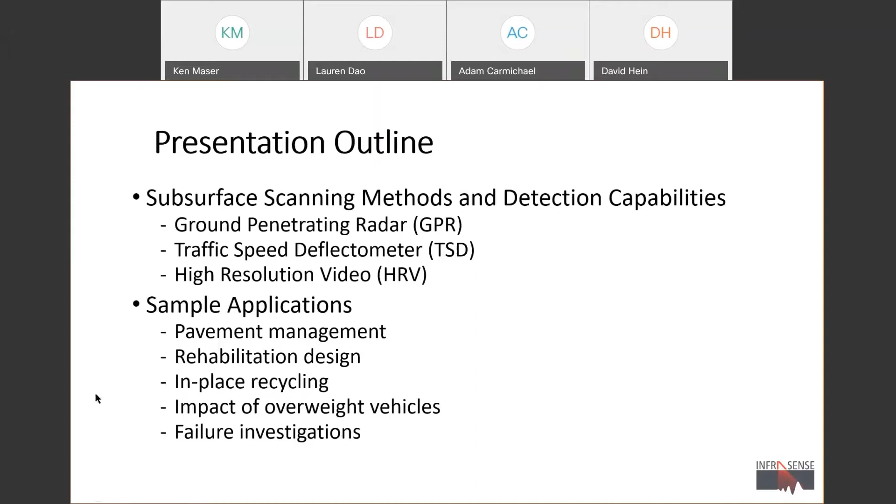So first I'll talk a little bit about ground penetrating radar. I know the Minnesota Materials and Research Group has done a lot of work with GPR, but for those of you who are less familiar, I'm going to go over it a little bit.

The sensing elements in GPR are the antennas. They transmit radio waves down into the pavement, which reflect off of the different elements in the subsurface and come back up and get measured.

The setup shown here is the typical highway survey setup. The antennas are in the back on this vehicle; on some vehicles they're in the front. But because they can operate elevated above the pavement surface, data collection can take place at normal driving speed.

The rate of data collection can be controlled using a DMI, a distance measuring instrument, and you can choose to collect 1 scan per foot, or 4 scans per foot, or 1 scan every 4 feet, whatever you choose. So the rate of data collection is quite flexible.

The location of the data is logged with a GPS, generally mounted to the vehicle, so that every piece of GPR data has a lat and long associated with it. So when we plot out the data, we know exactly where it is.

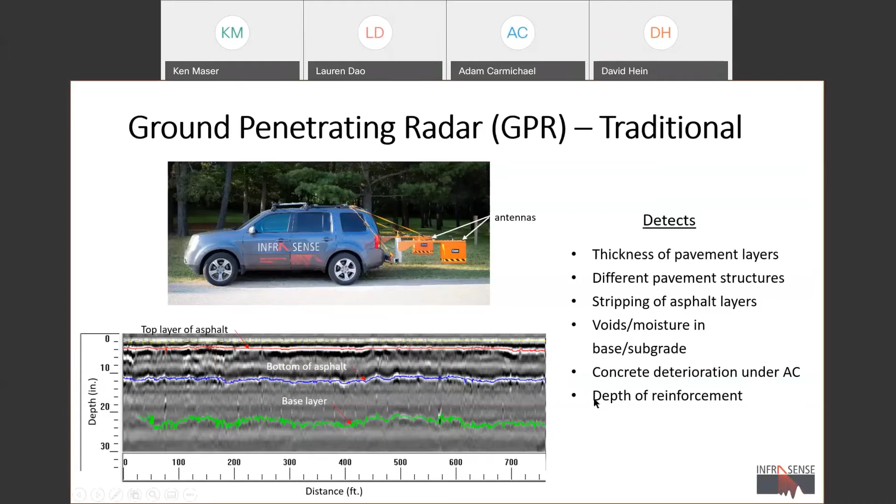Here are a couple of GPR images that show a little more detail. On the left, we have a composite pavement which has been overlaid. Basically the surface is all asphalt, but the interest was in finding areas that had been repaired, which you can't see from the surface.

But with the GPR, you can see these little hyperbolic blips are the rebar for the concrete, and you can see they're absent in this middle section, which is where there's a full depth asphalt repair.

So in this particular project, those repair locations could be readily identified, even though they couldn't be seen from the surface. On the right, we're looking a bit deeper, down to about 2 meters, where we're identifying 3 culverts. You can see them by the shape of this reflection, along with the frost taper associated with their excavation.

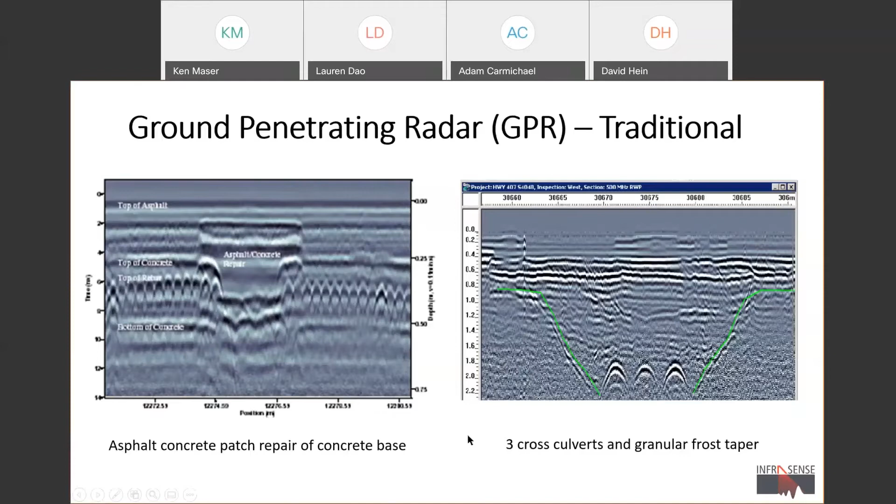Now, I've referred to that so far as traditional GPR. There's a newer type of GPR system called 3D radar. The GPR I showed you had 1 or 2 antennas, and you got a single line of data at a particular offset. With this 3D radar system, this unit on the back of the vehicle has actually 21 antennas, each of them 3 inches apart.

So in addition to getting quite a bit of detail going longitudinally down the road, which is normal for GPR, you also get a lot of detail going transversely. So certain issues where we need information in detail in both directions are very well addressed with this newer 3D radar system.

The example I've shown here is a bridge deck, and what we're looking at is a plan view looking down on the deck at a particular depth, in this case the depth of the rebar. In this depth slice, you can see the entire deck, you can see the joints, and you see evidence of reinforcing, with that rebar pattern blown up for one of the spans here. So you see all the transverse bars, and you also see the longitudinal bars as well.

So quite a bit of detail in both directions is available with this kind of system.

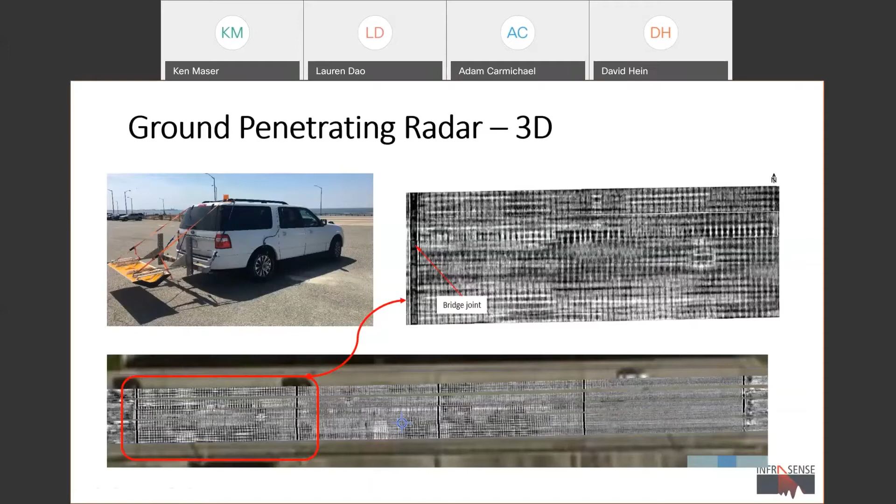The second technology I'd like to discuss deals with measuring deflection, traditionally done using a falling weight deflectometer. More recently, we've seen the introduction of the traffic speed deflectometer, a piece of equipment that can measure pavement deflection while moving at normal driving speeds, allowing deflection measurements on up to about 200 miles of pavement a day.

The system works with a series of Doppler lasers mounted forward of the rear loading axle, and each of these lasers measures the velocity of the pavement. By combining the vertical velocity of the pavement with the horizontal velocity of the vehicle, you can get the slope of the deflection curve. Once that slope is integrated, you get the deflection curve. So with this system, every hundredth of a mile, a deflection curve is reported. Quite a bit of information.

The TSD goes quite well with GPR because both are getting continuous information. By combining those two with the layer structure and the deflection, we can go through back calculation to get the pavement moduli, the subgrade modulus, and then calculate structural number and remaining life. At the bottom right here is a plot of remaining life. With that information, we can segment the pavement into subsegments based on remaining life, which for making decisions is a lot more effective than dividing it up based simply on surface condition.

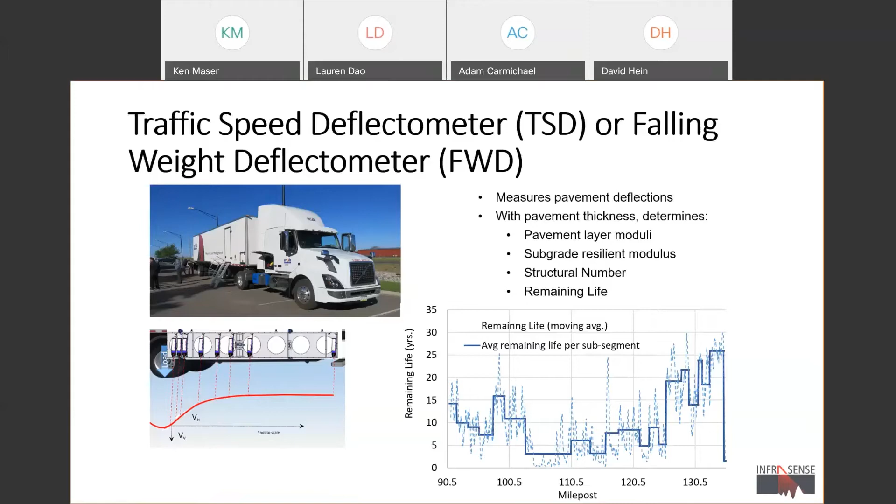We combine subsurface information with near surface and surface information. This is a system that does both high resolution video and infrared thermography. The cameras are mounted to a vehicle imaging the surface of the roadway directly in front of it. The infrared image shown here in the middle shows anomalies associated with delamination in the concrete. The sun hits the pavement, the areas over the delaminations get hotter because the heat can't travel through, and they get picked up very readily with an infrared camera.

So that's another bit of subsurface information we can add. Finally, we incorporate it all into the surface image by stitching together a complete video of the surface, so now we see all the surface features we're accustomed to looking at, including cracking, map cracking, fatigue cracking, longitudinal and transverse cracking, spalling, etc. So now we have the complete picture — we've seen elements of the subsurface and elements of the surface.

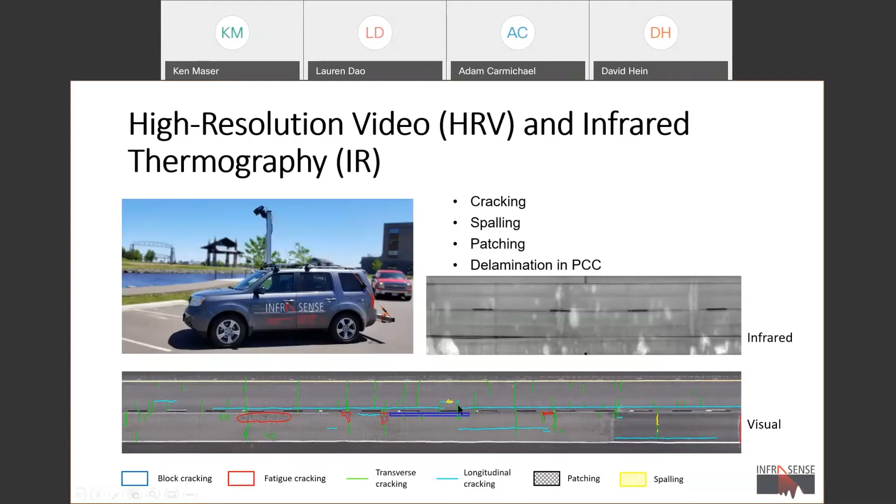That's where we're starting, and the idea here is to take what we see on the surface and understand that it's caused by something going on underneath — whether it's weak subgrade, stripping in the asphalt, inadequate pavement structure, voids under the joint, etc. The better we understand those conditions, the depth, the nature and extent, the better decisions we can make about how to address them.

So there are various applications of this methodology that we'd like to discuss, and we're going to do that over the remainder of this presentation.

One question has to do with validation with cores for pavement thickness. That's often done — it's not necessary for the analysis, but precision can be tightened up by having cores available, and cores are also useful to identify material types within the pavement structure, which are not necessarily obvious with the GPR.

A second question is, can the 3D radar look at dowel bars or tie bars, and if so, what accuracy? The answer is yes, and it's been done. I have not included that in this presentation, but if you send an email or contact us, we can send you some information on that.

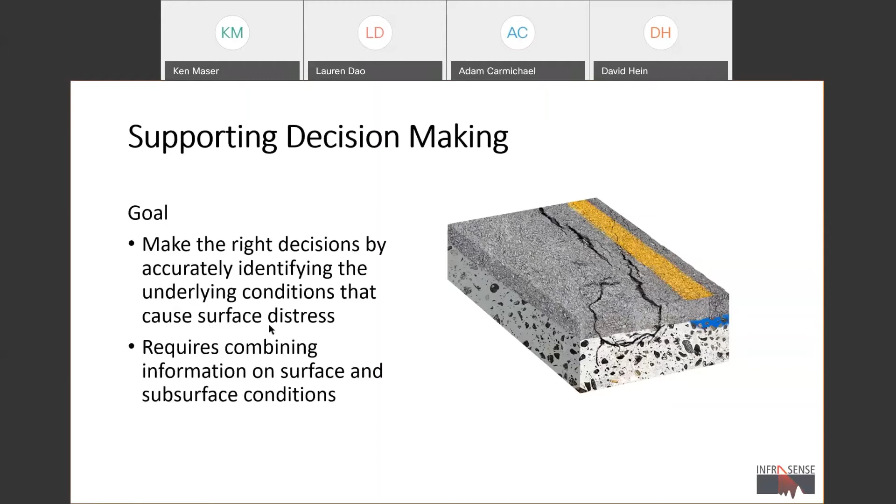So I'm going to move on and talk a bit about some applications. The first application is network level pavement management. The idea is to make decisions based on remaining life, which seems to me a more sound way of making decisions rather than simply on what the pavement looks like on the surface. Those decisions, the remaining life, would be calculated using information on the pavement structure.

This analysis would be achieved by combining the deflections from the TSD with the layer thicknesses from the GPR to get the various moduli, structural number, remaining life, and then calculate with traditional methods the required overlay thickness and remaining life. So we get quite a bit of information here.

TSD and GPR provide information every hundredth of a mile, so we get hundreds and typically thousands of data points for a particular network. We found it useful to present this information in a geospatial way so it could be easily visualized for both network and project level decision making, and also aggregated into homogeneous units for management decision making.

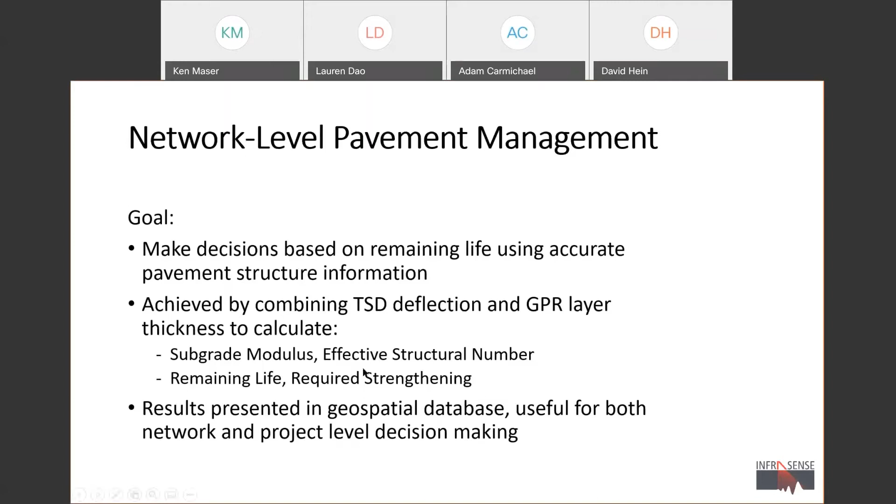This is one example of that visualization, showing asphalt thickness on a 1,000-mile network out in Idaho. This display uses Idaho's GIS system called iPlan, so anybody can go there and look at this data. This is showing asphalt thickness, with the color scheme being less than 2.5 inches as red, greater than 8 inches as green, and various colors in between. So you could very quickly get a look at the layer thickness on this network.

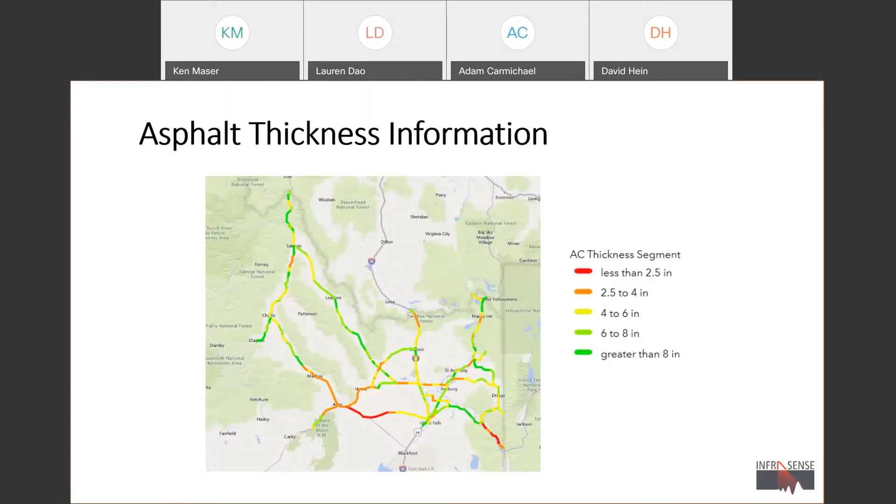But even further, we can take the TSD deflection data collected on this same network, do the analysis, and calculate remaining life. This picture shows the remaining life, also color-coded, with red being less than 3 years and green being greater than 17 years. So very quickly we get the picture of what's going on. We can zoom in and get quite a bit of detail, seeing things of interest at the project level. All of the underlying information is in the attribute tables beneath these maps and plots, and you can download that information to get all the details.

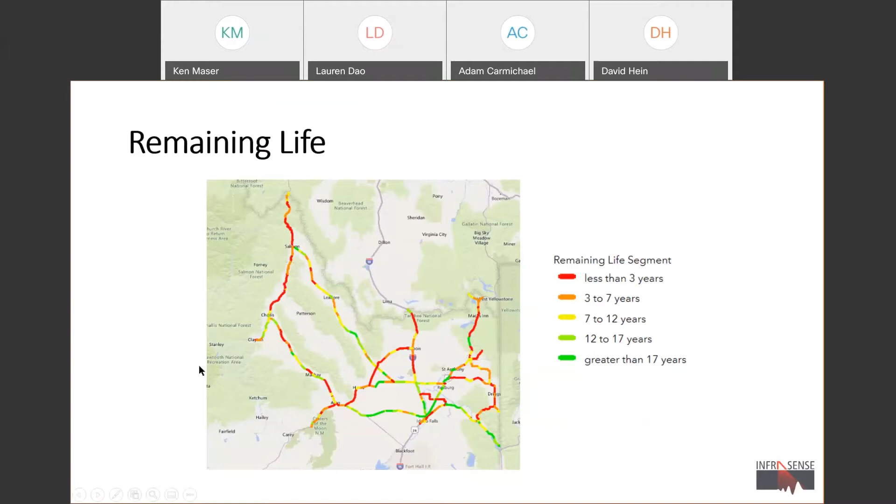A second application I'd like to discuss is rehabilitation design. In this case, the example is concrete repairs for a composite pavement. This was a 30-mile overlaid concrete pavement section exhibiting pumping and faulting at the joints, as well as surface cracking. The client agency needed to select the appropriate rehabilitation strategy, but the alternatives available differed in cost by several million dollars, so they wanted to make sure they were picking the right strategy and doing the right thing.

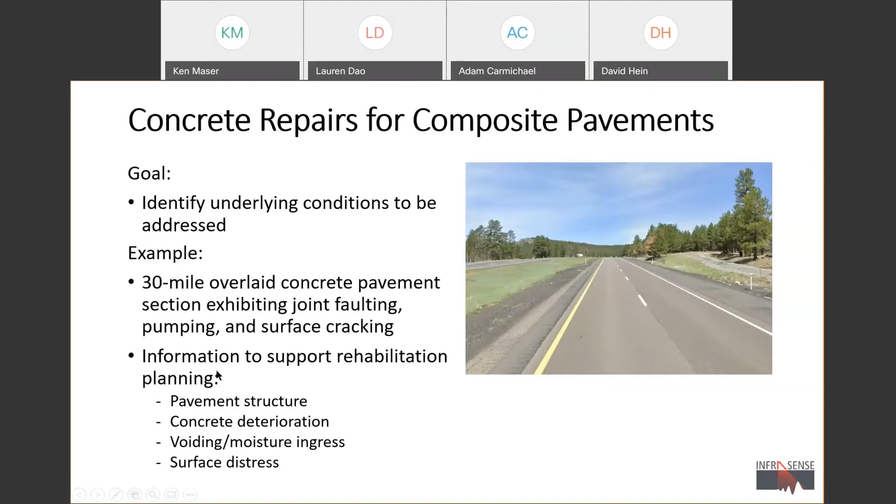So we carried out a fairly comprehensive analysis, looking at the thickness of the overlay, as well as the concrete, base, and subbase thickness. We located some full depth asphalt as well as composite sections. The locations where transitions between these pavement types would determine deterioration of the concrete underneath the friction course were evaluated, and areas where joints showed evidence of moisture infiltration and voiding were also identified. Surface distress was also mapped and combined with the subsurface information. This was a fairly comprehensive evaluation.

This slide shows examples of the type of information provided. In the upper left, percentage of area of concrete deteriorated underneath the asphalt versus project station. You can see it ranged in a lot of areas from 5 to 15%. Some places there was none, some it was quite high, but it gives a fairly big picture of the overall condition of the concrete.

On the right here, this is a GPR image of the concrete. This band I'm showing is the bottom of the concrete, and at every joint you'll see a little blip, but at joints with voids and moisture infiltration, that blip becomes a lot more prominent, and that can be calculated and identified. This table shows areas at stationing and coordinates where voids were located underneath the concrete, giving the agency the ability to go out locally, look at these areas, and do further investigation. Finally, at the bottom is a map showing both the surface distress and the deterioration in the concrete underneath the surface.

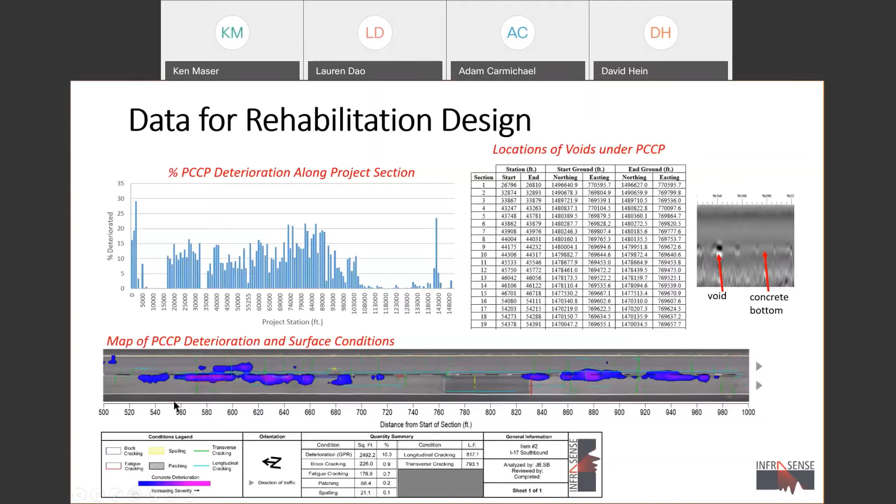About in-place recycling. Thanks very much, Ken and Lauren, for the introductions, and all of you folks for spending a little bit of time with us here today, talking about pavement rehabilitation and rehab, et cetera.

One of the other really useful applications of GPR technology is in helping support things like in-place recycling efforts. A lot of what we do these days is not so much designing new infrastructure, but rehabilitating what we've been constructing over the last 40 or 50 years or so.

Thickness is really important in technologies such as cold in-place recycling, and full depth recycling, be it with emulsion or with expanded/foamed asphalt. The asphalt thickness itself - we typically want to recycle as much as we can in situ. This helps with reducing waste and is less expensive than many other techniques.

One of the key aspects we need is the thickness of the asphalt in particular. So we typically will go out there and design our recycling efforts to take not all of the asphalt layer. We need to leave some material behind for a couple of reasons.

One being we need something relatively good to support the recycling equipment, because some of this - you see the train in the picture here - is very long and quite large.

But also because we design our recycling efforts to add emulsion or expanded asphalt to optimize the remixing of the material and laying it back down on the roadway.

So on a lot of these projects, longitudinally on the roadway, most people don't really know exactly what the thickness of materials are. Maybe they did 50 years ago when they first laid them down, but ultimately we typically do some cores, or maybe boreholes, but at least cores to validate the thickness of the materials.

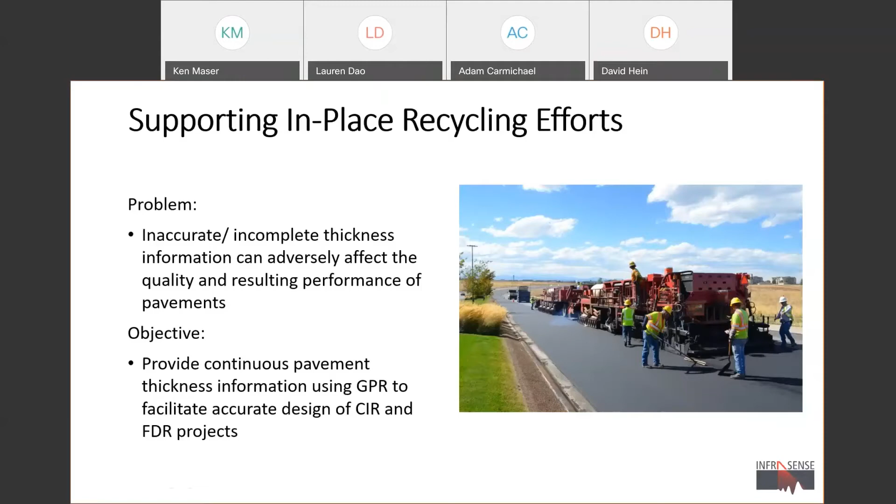Go to the next slide, Ken. So we go down the roadway, collect data. This data can be done, as Ken showed you, with the 3D radar, where you're doing an entire lane width potentially. It is more expensive to collect data using that type of equipment than a traditional GPR device.

So you can also go down the roadway multiple times, and I see that was one of the questions that was asked earlier - do you go down it with one radar device in one line? Well, we can offset that on the vehicle, or the vehicle itself being offset potentially, and we can take multiple passes longitudinally down the roadway.

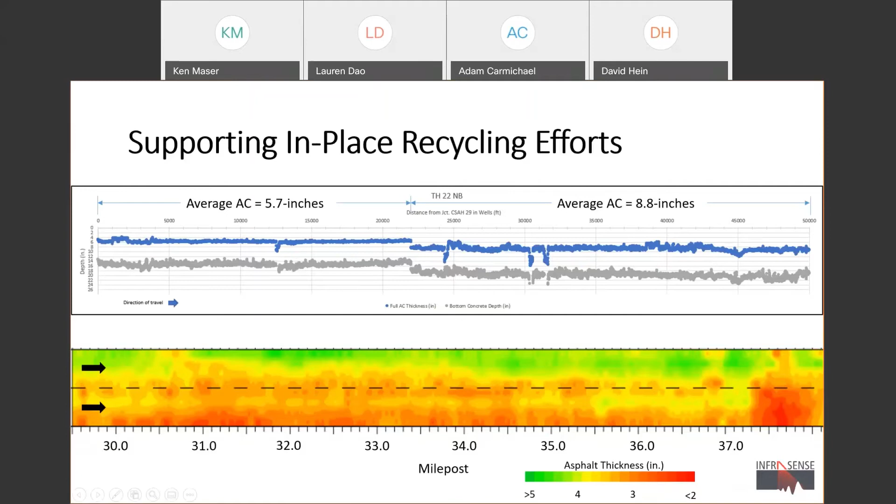Utilization of GPR data in conjunction typically with deflection data, be it the TSD that Ken mentioned earlier, or potentially conventional falling weight deflectometer type deflection data.

And everybody's got this problem: overweight and super heavy loads. Ultimately, we put load restrictions on our roadways to protect the roadways so that we will not consume all of its life. In the northern environment, certainly in Minnesota, we have spring load restrictions.

A lot of work has been done actually in Minnesota on spring load restrictions, contrary to the desires of the trucking industry, obviously, because when roads are frozen, with high stiffness, it's not a problem - we can move loads with minimum damage to the pavement structure. But in the summertime, when we've got the water out of the pavement, it's well drained, it's going to have pretty decent structural capacity.

But in the springtime, that very short period, maybe 4 weeks, 6 weeks, maybe some places 2 months, we can consume 50, 60, 70% of the life of the pavement in that very short period of time, because we've got water in the pavement. It was frozen, it's starting to melt. That water acts like a lubricant between the individual aggregate particles and the soil particles. And so they're in its weakest condition.

So we don't want to have heavy loads, so we slap on spring load restrictions. The trucking industry is not happy with us. We want to make sure we get them on before it starts to unfreeze. We want to take them off as soon as we can. So a lot of people do a lot of work over the years in evaluating that infrastructure to get the right time when we can allow the trucks to go back on.

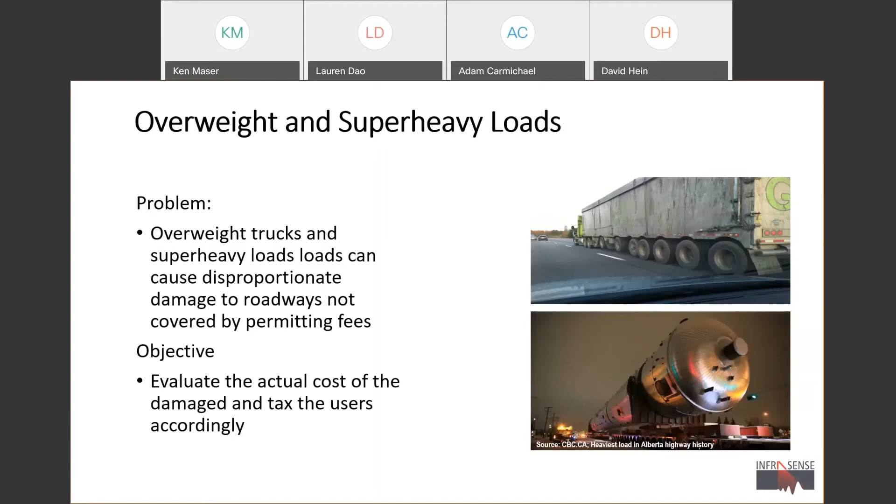So I've got basically three different methods that we use to calculate potential impact. And the most common one, and a couple of questions earlier were asked about the methodology for structural capacity or remaining life. And AASHTO 93 is one of the easiest ones that most people use. I call it a simplified method. It is very coarse. It's based on research and work that was done back in the 1950s, 1960s. It is being replaced nowadays by mechanistic design, pavement mechanistic design.

And what we want to do is collect data. Particularly, we need pavement structure information, because that's converted to layer coefficients and the structural, the modulus elasticity of the individual layers that turn into layer coefficients, and then they may be discounted based on the condition of the pavement. In other words, the asphalt may have a layer coefficient of 0.4, 0.42, and you're going to assign it something like 0.3. So the condition is part of the information.

It may be based on structural capacity. So using AASHTO 93, you can use the in situ structural number, the SNeff, the effective structural capacity, and assess some sort of damage to it. So we look at, here's what the in situ is, here's what the vehicles that are going to be using it, what is the remaining life, what is the consumption of that remaining life of the pavement.

And it's very different if it's a major interstate, that are built to handle loads without spring load restrictions than it is with a rural roadway or rural highway. Rural highways, one pass of this vehicle may consume 20, 30% of the life of the pavement. And this happened, and I know from personal experience in Pennsylvania, when all of a sudden we've got all the water trucks and these concrete trucks and the sand vehicles for fracking, et cetera, literally destroying the pavement, with the number of loads they have in the period, and they were literally pushing equipment out with dozers because they got stuck in the pavement.

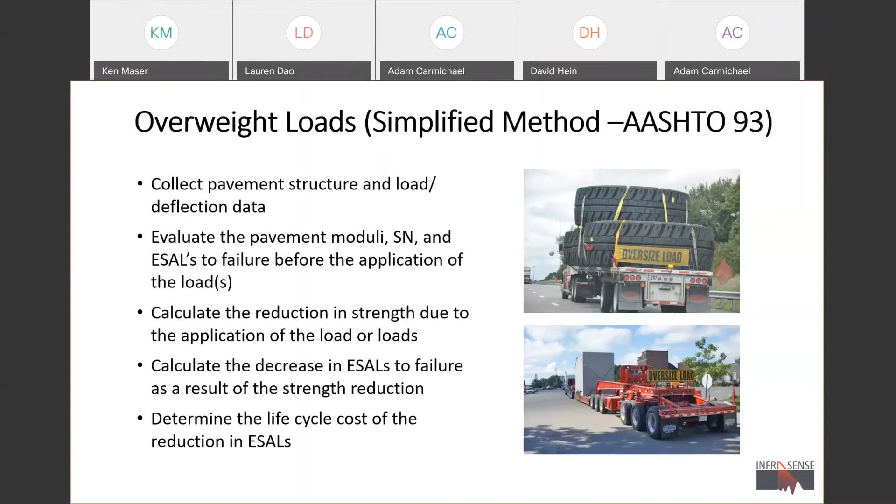So especially with the lower volume roadways and the thinner pavement structures, you could cause significant amount of damage. So based on ESAL, relatively simple. Next one. So then we have what I call the mechanism.

Well, it's a pavement ME design, mechanistic design, and this has been used around the planet since the 1970s. The guy that taught me how to do this was Per Ullidtz from Dynatest in Denmark, and he was doing it on a programmable TI calculator back in the 1970s. So this is not new.

It is newer to North America than many other countries around the world - think France, South Africa, Australia, et cetera. A big effort was made starting back in the early 2000s to move to more realistic design, because we now have the computing power to do so.

It's not the deflection that causes the pavement to crack, it's the bending that occurs, the strains that occur in the pavement that cause it to crack. So when we're looking at moving some of these other heavy loads, we can use the new mechanistic design.

It's got a module in it that allows you to do non-standard vehicles, or you could do this using other techniques, of course, not just pavement ME. And so we take into account...

much difference in traffic. We no longer use ESALs, we use axle load spectra, which is the individual axles themselves, the quantities of them, and the weight on individual axles, because each of those different axles cause different stresses and strains. So we can use the ME design to calculate things like what additional thickness would I have to apply to the pavement to get the same stresses and strains we would have had without those vehicles.

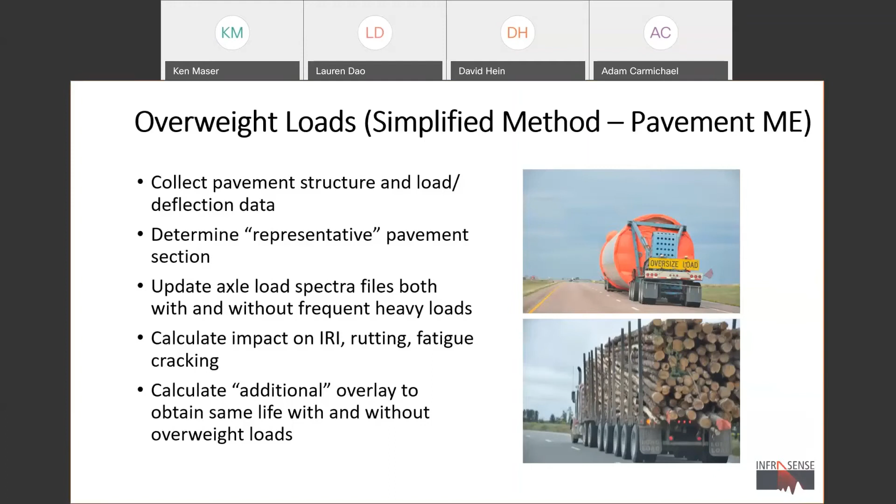And by doing that, we can assess the additional strengthening that's needed - maybe a quarter of an inch, or a half, or an inch of material - and we can assess that cost and lay it on the people who are using the roadway and consuming it, that normally would not have been doing that.

Then we have the more complex, super heavy loads. Again, here's another reason why it's really important to have the pavement structure, because the methodology I'll show you here that we use to calculate stresses and strains is specific to the individual load.

So we've got one huge cracker that's used to convert oil into polyethylene, or polypropylene. They're not going to be doing this on a continuous basis, they're going to be doing it once - moving a piece of equipment that was built in point A to point B, where it's going to be provided in an industrial facility.

Some of these facilities are very rural, and they go over large areas of roads. So you may be looking at a movement of a vehicle that's going to go a couple hundred miles. As much as possible, we put them on barges or boats, sometimes rail, but usually there are elevation issues with that, so they end up moving down the roadway.

We can move power lines higher, or other elements. We can plate the pavement to make sure we don't crush the culverts and stuff like that. So pavement structure information is really important, because the methodology to calculate the stresses and strains takes a long time.

So we have to develop what we call representative pavement sections. We don't go out - I had a client once that asked me to analyze 1,000 miles of road using pavement ME every 500 feet. This would take the rest of my life, or a massive amount of computing power, to make that happen. So developing a representative pavement section is really important.

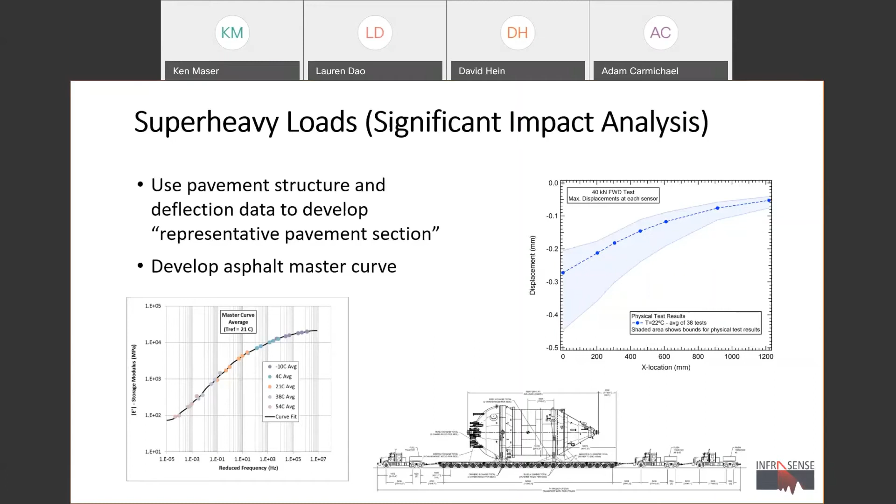In the individual vehicles, you see the axle loads on the bottom left-hand side there. We've got a substantial number of axles. The equipment is different, it's used to level the weight over all the axles more evenly. The rubber in the tires is 10 times the thickness of normal tire rubber - very thick walls in terms of thickness that don't allow the tires to spread out. So their impact on the pavement structure is really, really important.

And I can't do this every 500 feet - it's absolutely physically impossible because of the computing power required.

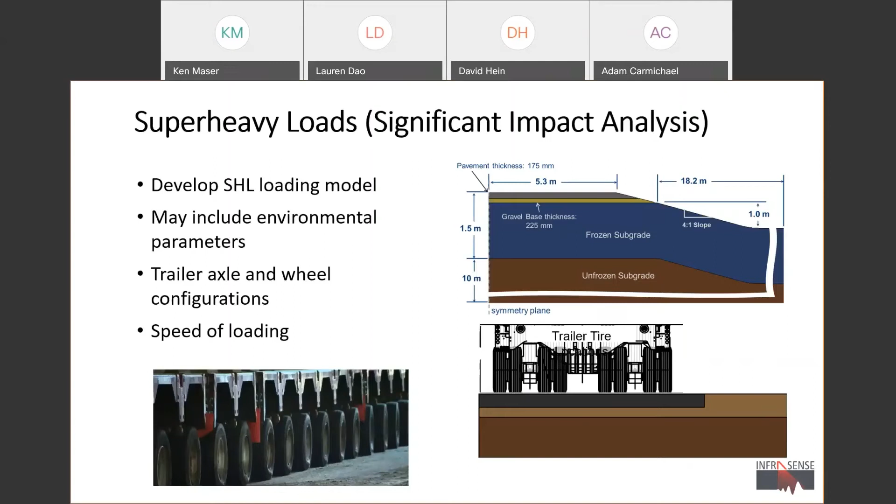So we look at them, and we will do a more detailed stress-strain analysis using much more sophisticated computing power than the pavement ME design, looking at individual impacts of the vehicle.

The graphic on the bottom right is basically a multiple axle. You're looking sideways at the deflection of the pavement as this giant vehicle comes moving along, and there may be 20, 30, 40 axles in a row. Each axle interacts with the others in terms of the overall impact on the pavement structure as a whole.

You also have issues with stresses and strains at the surface, because a lot of times the pavement bends upwards between the tires. So not only do we get strains on the bottom of the asphalt, we get strains on the top, and this has become something we've paid a lot more attention to in the last 10 or 15 years, because we can have top-down cracking, which traditionally in the 70s and 80s we never thought about. It started at the bottom and went up.

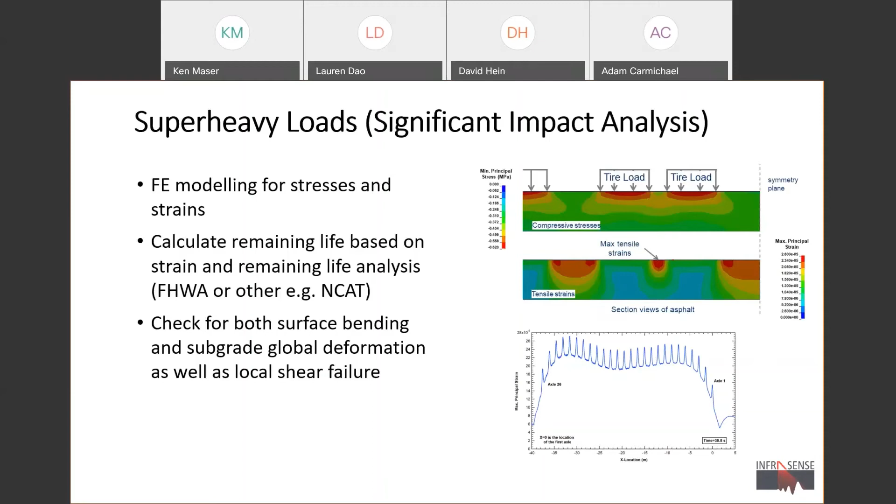Go ahead, Ken—I'll hand it back to you to talk a little bit about the failure investigations.

Discussing application to failure investigations, I have 3 different examples here. This was an interstate that was experiencing premature failure. There was a belief that it was a drainage problem, but the exact nature and extent of it wasn't exactly clear.

So we addressed this by doing 2 types of GPR surveys: one transverse to the roadway at various stations along the project, and one longitudinal down the roadway from one end to the other. From the transverse surveys we learned that in the area of damage, the drainage pipe, instead of being located under the shoulder where it was supposed to be, was misaligned and underneath the wheel path. So it was getting beaten on by truck traffic, eventually got damaged and clogged, and then moisture buildup and damage occurred in other places.

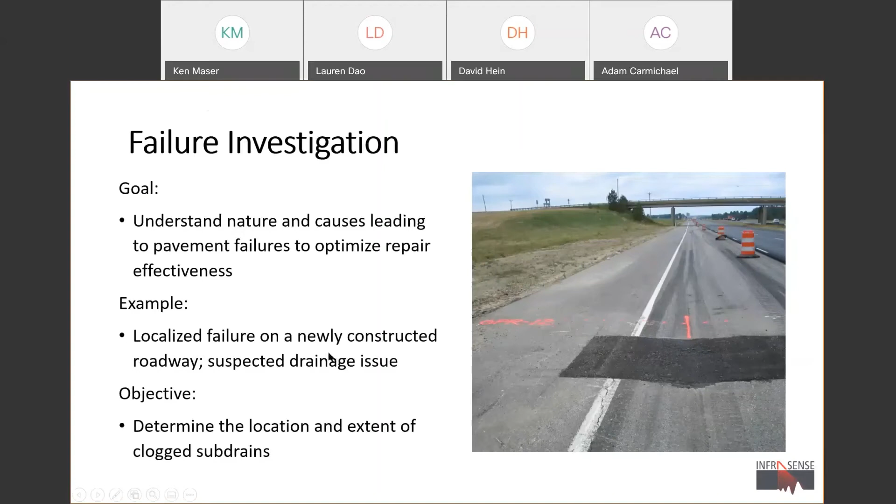Then the next question was: okay, that's the why, but how far, how much, how extensive is the damage? So we used the longitudinal GPR to calculate the dielectric constant of the base material. With the availability of some lab data on moisture content, we could calibrate the GPR to base moisture content, and could clearly see the areas where moisture content was above normal. That gave the agency the ability to focus the rehab on the area where it was actually needed.

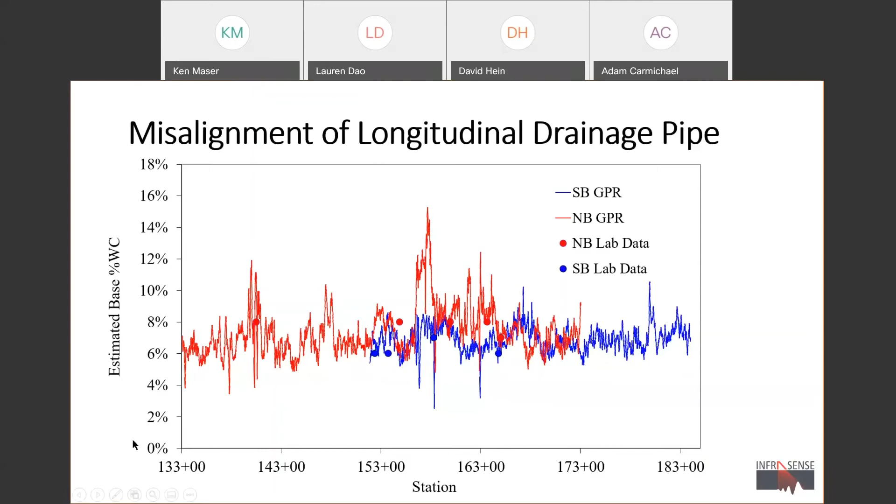Another application was in a flooding area, a city alongside the Mississippi that experienced flooding. It had concrete pavements, and after the flood, it was very clear from the surface that there was damage. Some of the slabs were settling. The question is, what about what we don't see, and what do we have to do to address what's going to happen as well as what's already happened?

So this project was addressed with GPR, looking at the thickness of the pavement and also detecting voids using a combination of GPR plus two ultrasonic techniques, impulse response and impact echo. The questionable areas were identified, and subsequent coring was carried out to validate these results.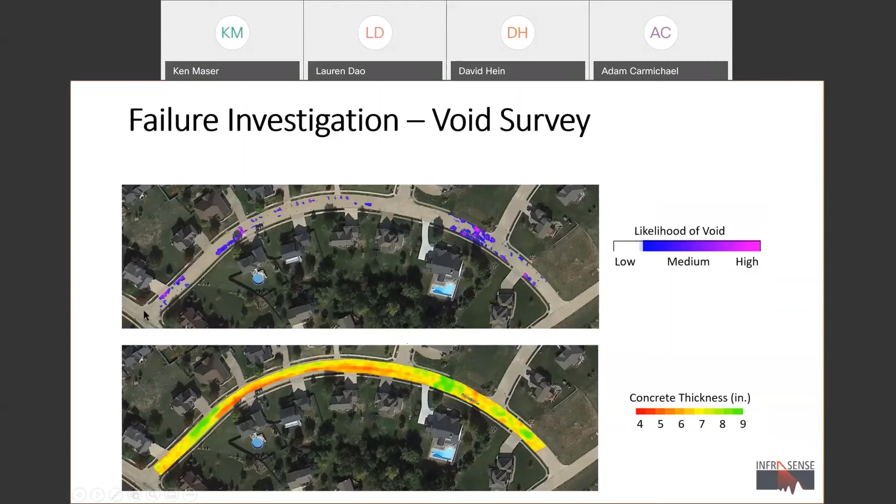Generally it's known that there's stripping, but the question is how extensive is it and what's the depth? This can be addressed using either the 3D radar system I discussed before, or the conventional radar system, by collecting multiple lines of data at different offsets across the lane, and then analyzing the data to show the locations and extent.

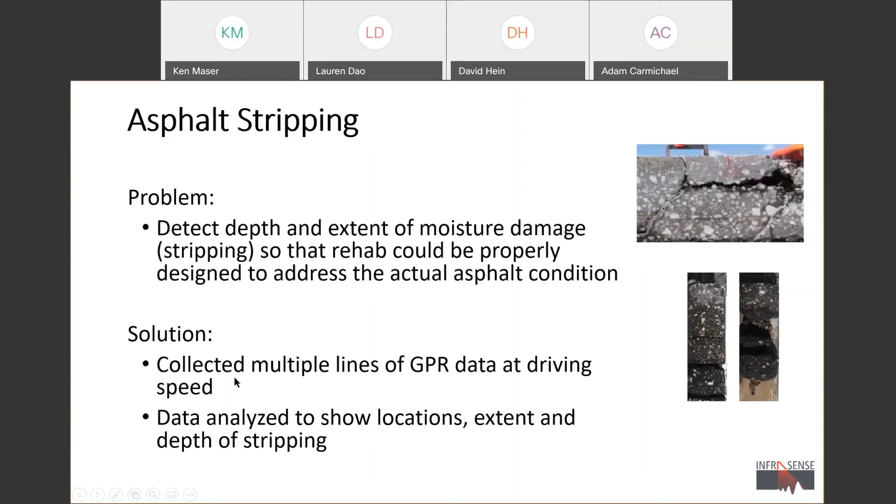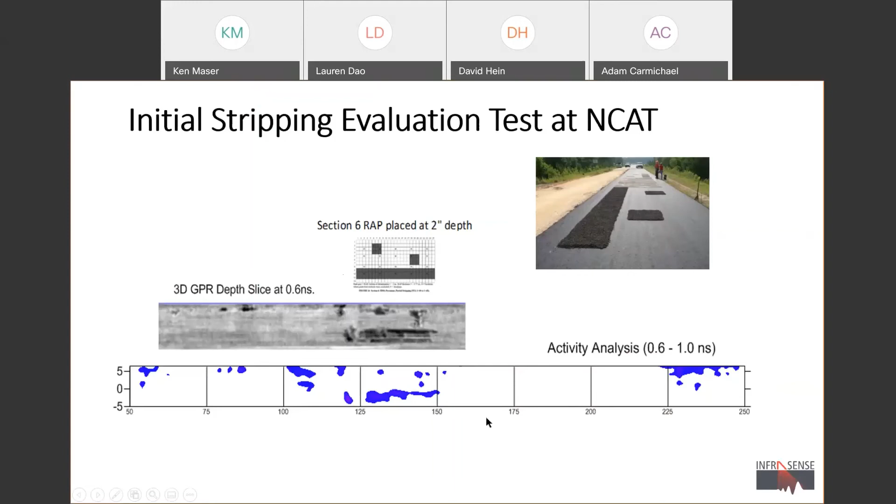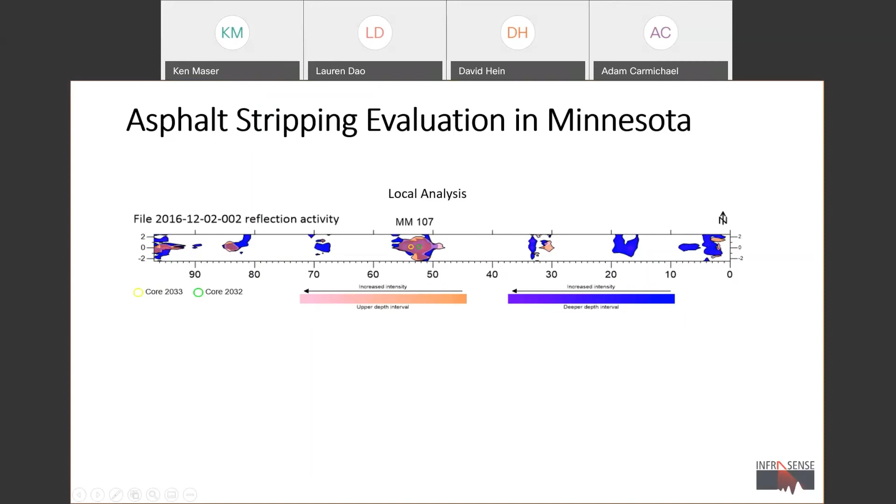So that's another application to failure analysis. Just to wrap up, the message here is that by looking at the subsurface and combining it with what we see on the surface, we can make better decisions and reduce costs. At the network level, we can reduce life cycle costs by making better decisions. At the rehabilitation level, we can optimize the rehab design by fixing the right problem and not overdoing it or underdoing it. We can characterize as-built data to avoid changes during construction by characterizing how much recycling is necessary to address what's already there, and also recover the cost of oversized loads by quantifying the damage. Finally, we can address pavement failures by accurately assessing the causes and addressing those causes in the most effective way.

So that finishes up our presentation.

I'm going to take a look. There are a few here, Ken. I can just paraphrase them for you, maybe.

There was a follow-up question regarding the use of cores - if we don't need to use cores, can we read the plots directly, or how accurate are the results without coring? You can read the plots directly, but that's an approximation. When you track the layers, as I showed, it calculates the velocity of the radar in the pavement and gives a much better quantitative result. Typically, without any cores, the difference between the GPR thickness and the actual thickness has been found to be less than 10%. With cores, you can do a little calibration and tighten that down to 5 to 7%. That's the range - the cores buy you a little more precision.